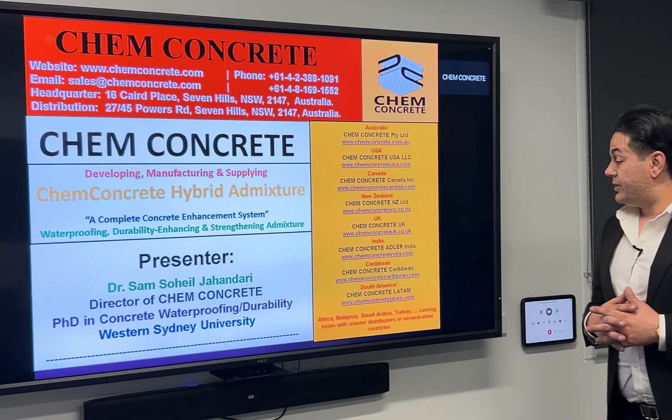Over the past 12 months, we have established manufacturing facilities in other countries as well, like in the USA, Canada, New Zealand, UK, India, the Caribbean, and South America. For more information about these companies, you can check out their website. Right now we are working with other top partners to establish the company in Africa, Malaysia, Saudi Arabia, Turkey, and a few other countries. In some other countries, we also have distributors.

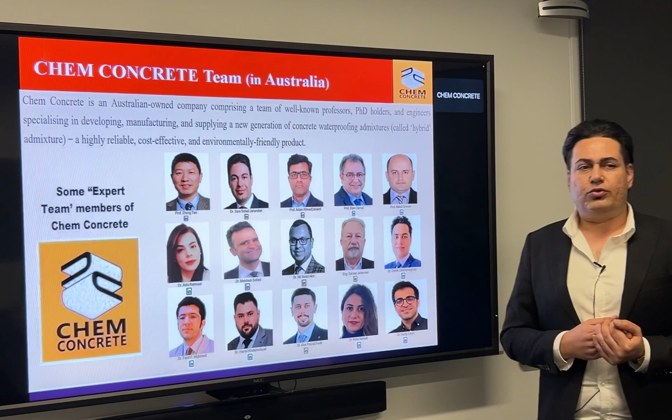We have a very good team at ChemConcrete. You can see some of our team members, just some of our team members in Australia. In general, as an Australian-owned company, ChemConcrete is a rapidly growing company comprising a team of 6 globally distinguished full professors, 14 PhD holders right now, and 12 engineers and some concrete technicians, mostly specialized in the area of concrete technology, concrete durability, concrete waterproofing, with different backgrounds from materials engineering, civil engineering, and chemical engineering.

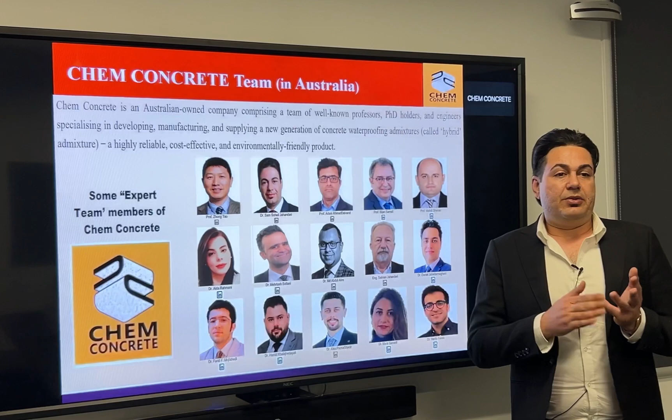The good thing about all the team members at our company is that at the same time they all have extensive industry experience in the concrete industry, and at the same time very good experience in the research sector and research studies. So they know what's going on in the industry, in batching plants, in design sector, different stages of construction, and they are highly specialized in product development as well.

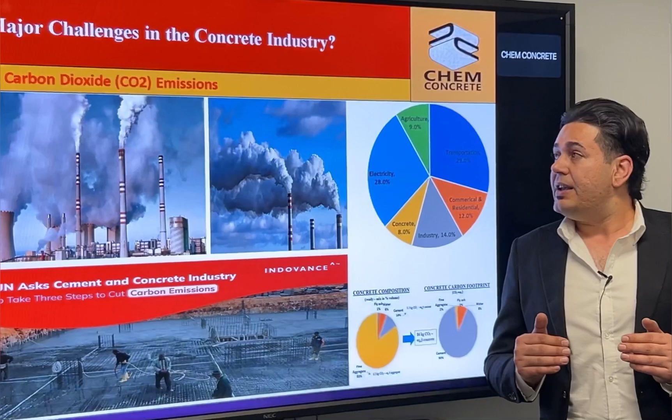When it comes to the concrete industry, two of the most important or major challenges exist. The first one could be carbon dioxide emissions. As you know, cement and concrete industries are responsible for almost 8 to 9% of global CO2 emissions, and it's been for decades that everyone in the construction and research sector has been looking for ways to reduce the carbon dioxide.

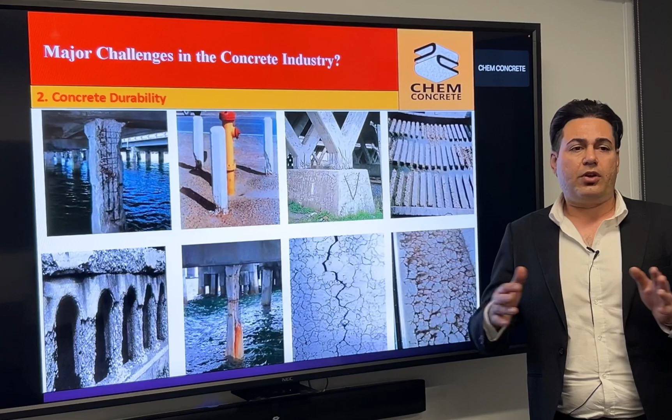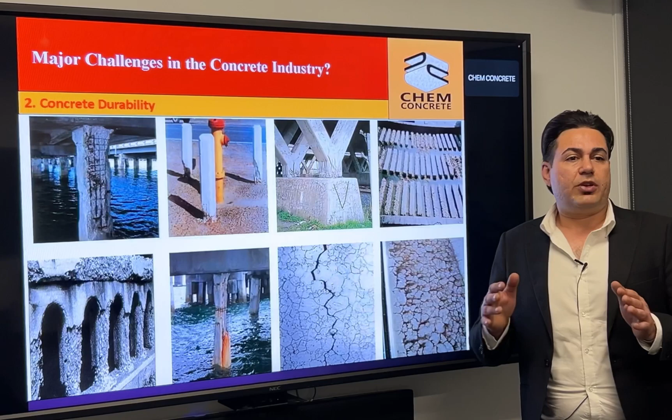The next major issue in the concrete industry is the issue with concrete durability. In all these aggressive conditions, for example exposure to seawater, salt, ASR, sulfate attack, freezing, thawing, reinforcement corrosion, the ingress of water and the corrosive chemicals inside water is the main reason responsible for all the major physical and chemical degradations of concrete structures and pavements. Research has proved that by stopping water and the waterborne contaminants from penetrating into the concrete, we can significantly increase the durability and lifespan of concrete. So water is the enemy of our concrete and construction sites.

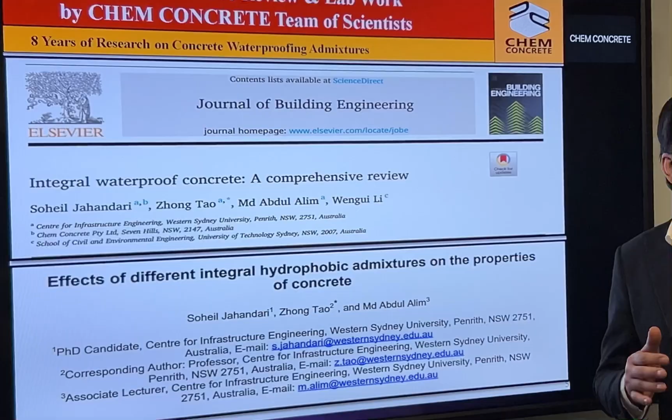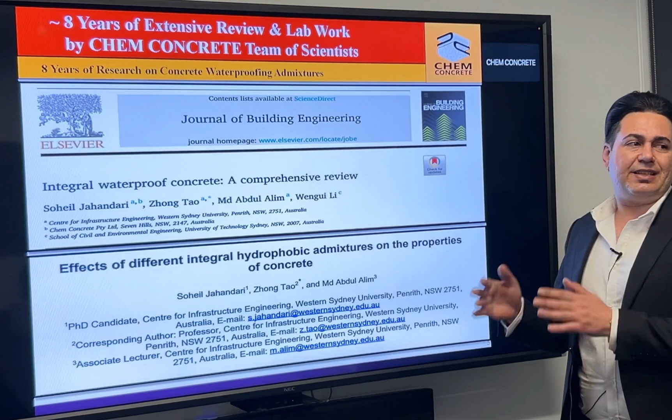Over the past almost 8 years, our team at ChemConcrete has done extensive literature review studies, as well as significant experimental work on development of concrete waterproofing admixtures. So far we have reviewed probably over 5,000 articles, books, reports, almost all the existing literature on concrete waterproofing admixtures and durability.

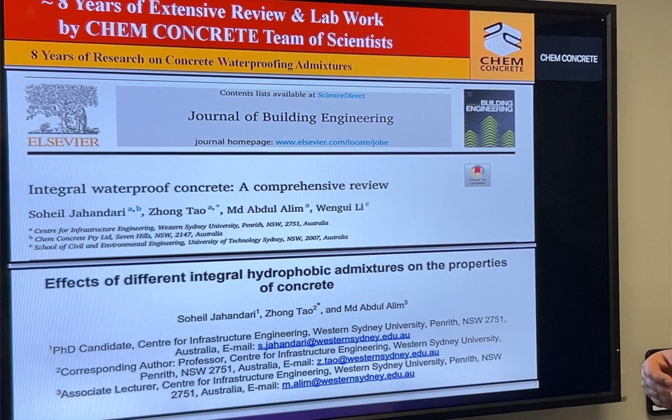At the same time, we have also published some of the most comprehensive sources in the area of concrete waterproofing and durability. For example, you can see the first article here, Integral Waterproof Concrete, a comprehensive review, which we published probably around 2 years ago. It's currently, to the best of our knowledge, the most comprehensive source on concrete waterproofing for engineers, R&D experts, and university researchers involved with developing waterproof durable concrete.

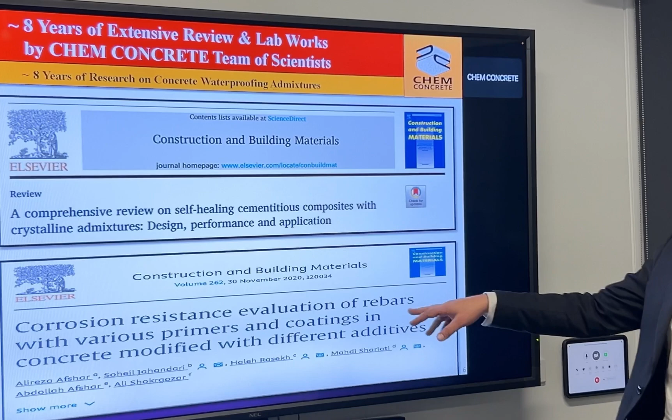You can see some other articles, for example on different types of waterproofing admixtures. Next is one on hydrophobic admixtures, then an article on self-healing or crystalline admixtures. The other one is on coatings, primers for reinforcement corrosion, and different supplementary cementitious materials or other additives. They are all published in top SJR Q1 journals.

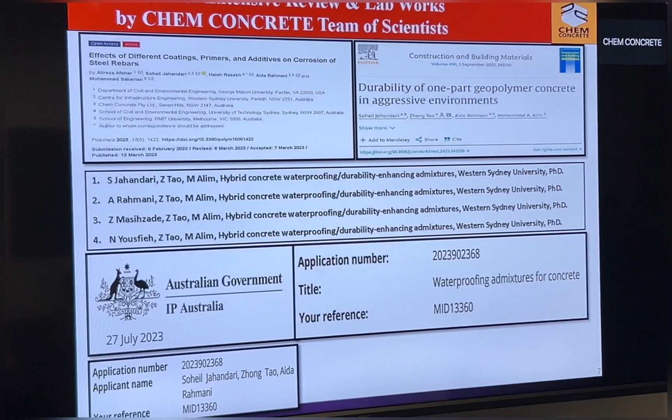At the same time, we have published articles on different types of concretes. For example, the recently published article focused on the durability of one-part geopolymer concrete in comparison to ordinary Portland cement-based concrete, as well as two-part geopolymer concrete. The other one is on different types of coatings, primers, and additives.

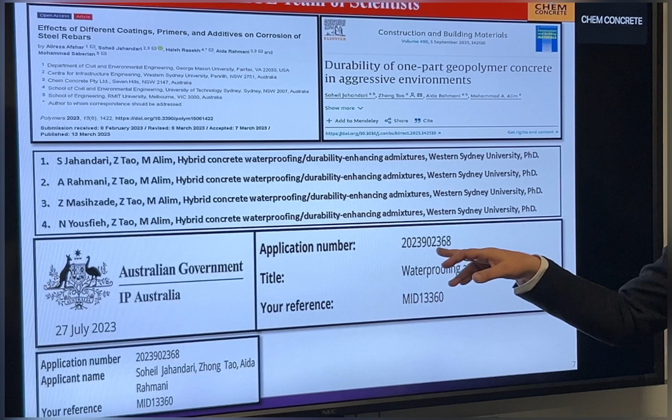Right now we have 4 or 5 PhD students whose research studies have been focused on further advancement of hybrid concrete waterproofing admixture technology at Western Sydney University. You can see the research topics we've been working on, and also the patent that we have with the Australian government, the IP.

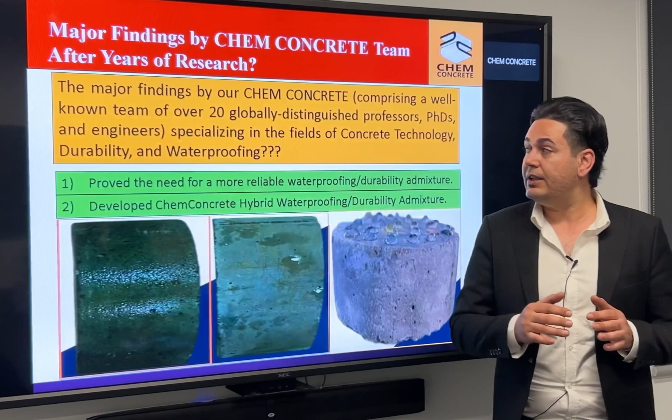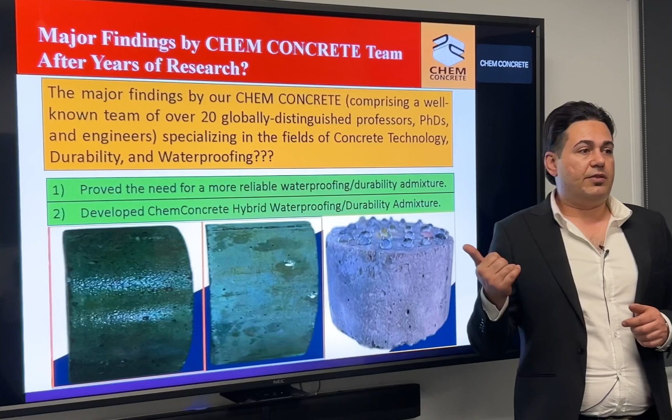Probably if I want to summarize the main findings of our nearly 8 years of research studies specifically focused on concrete waterproofing and durability, our well-known team right now has over 20 globally distinguished scientists, PhD holders, and engineers specializing in this field. We have everyday testing by our R&D team in our private laboratory, ChemConcrete laboratory, as well as partnership collaborations through the Australian Research Council with Western Sydney University, University of Technology Sydney, and University of New South Wales, the best universities in Australia.

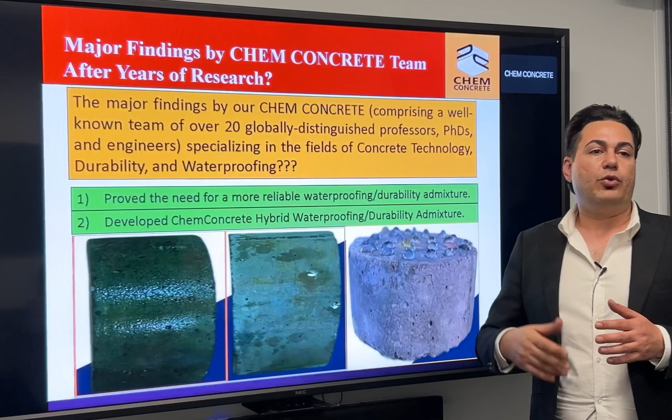If I want to summarize the major findings of our research studies in just 2 small sentences: the first one is that we proved there is a need for developing a more reliable concrete waterproofing or durability enhancing admixture. Once we proved that, we worked for several years to develop ChemConcrete Hybrid Admixture.

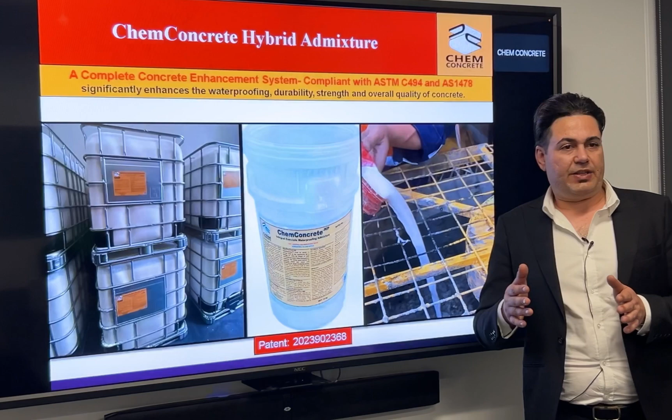The next step, we worked for several years and developed ChemConcrete Hybrid Admixture. Initially, we were aiming to develop a concrete waterproofing admixture with the efficacy to reduce water absorption and permeability of concrete by up to 90%. But at some point, during the development of the admixture, we came up with a product that's not just a waterproofing admixture, but a complete concrete enhancement system, being waterproofing, strength enhancing, and durability enhancing at the same time.

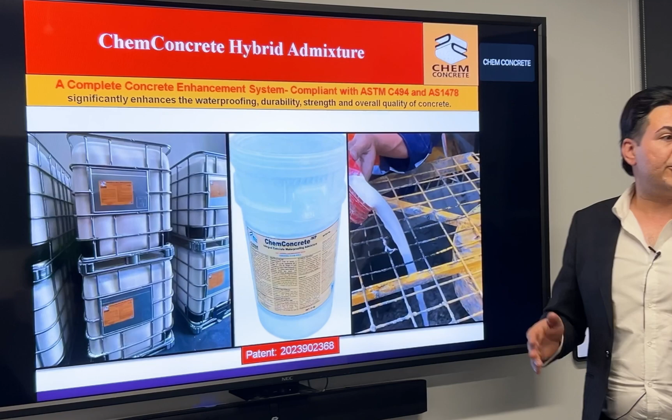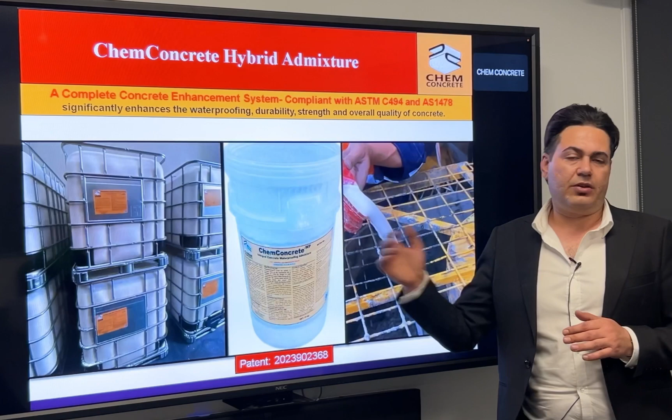It significantly improves the waterproofing, durability, strength, and overall quality of concrete, as well as fresh properties like finishability, pumpability, almost everything. It's in a white liquid form, somehow similar to milk. We normally supply it in 1000 liter IBC tanks, though we have quite limited supplies in 15 liter pails as well. The focus has always been on wholesale supply.

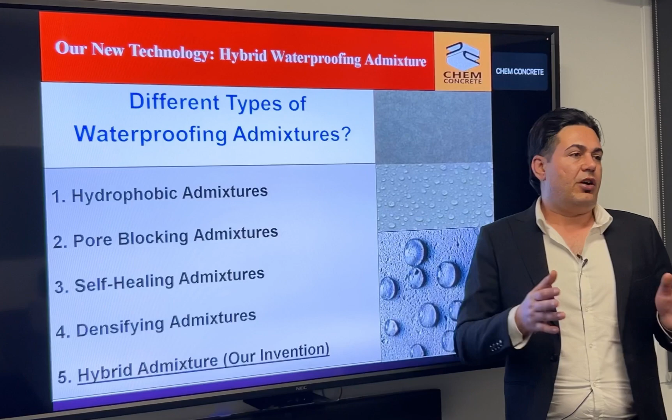Regarding the difference between this technology and existing technologies on the market, before the introduction of our ChemConcrete hybrid waterproofing admixture, these waterproofing admixtures were broadly classified into 4 main groups. The first group, hydrophobic admixtures, works only under non-hydrostatic water pressure, not hydrostatic water pressure. These hydrophobic admixtures typically only slow down the rate of absorption, they don't reduce the ultimate water absorption, meaning the longer the treated concrete is exposed to water, the higher the amount of water it absorbs.

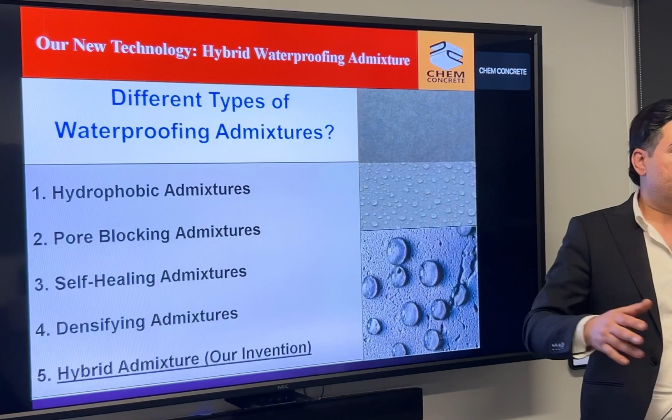The next group is pore blocking admixtures, then self-healing admixtures. Crystalline admixtures are also classified under self-healing admixtures, and then densifying admixtures. While doing all the testing and literature review, studying all the publications done so far on these types of admixtures, we noticed that in the case of hydrophobic admixtures, in the best case, they could reduce water absorption by up to 18-20%. In case of pore blocking admixtures, up to about 15%.

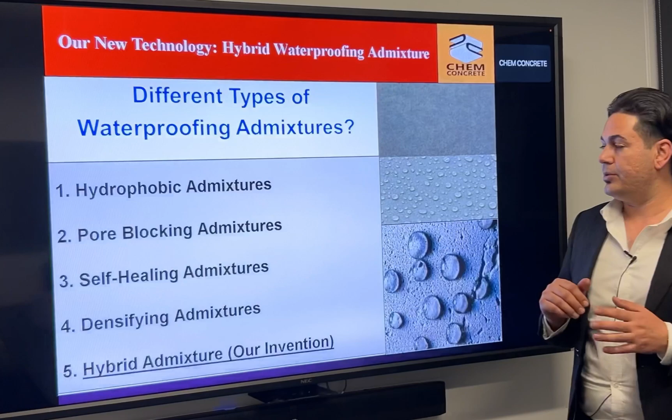Self-healing or crystalline admixtures have a different mechanism. They absorb water and then keep it to develop crystals that fill out concrete micropores, thereby resisting absorption. So again, up to 10-12%. Densifying admixtures like nanochemicals, as well as sometimes supplementary cementitious materials, are also classified into this group.

Their efficacy in terms of developing a true waterproof and durable concrete is extremely limited, and that's why most researchers and engineers do not classify them as waterproofing admixtures, based on the definitions of waterproof concrete.

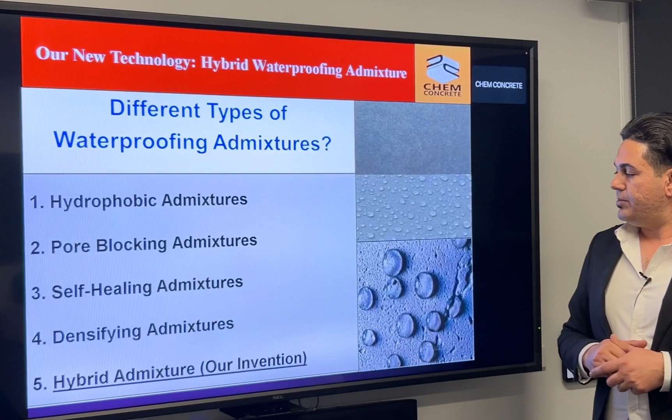So what we did was add a new category of concrete waterproofing admixtures, fundamentally different from all the existing admixtures on the market, called hybrid admixture. It's called hybrid because it's somehow a combination of all the existing admixtures on the market.

At the same time, for example, ChemConcrete hybrid admixture, known as the first hybrid concrete waterproofing admixture, is made of several proprietary chemicals such as hydrophobic or water repellent agents, pore blocking chemicals, self-healing agents - not crystalline but self-healing agents, because there are different types of self-healing agents - nano-size densifying admixtures, and some proprietary chemicals. This means we've used a wide range of different mechanisms to severely disrupt the capillary system and reduce water absorption and permeability.

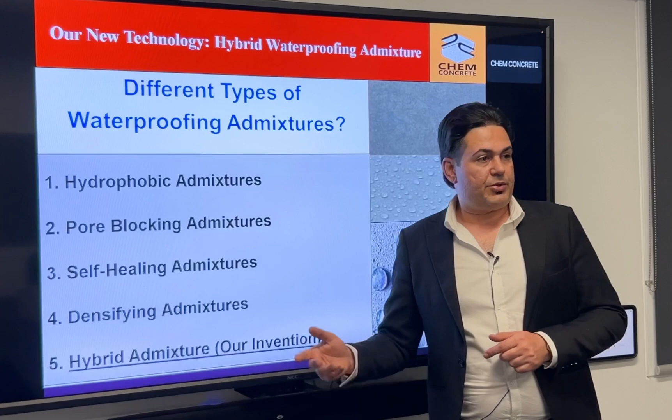That's why independent testing as well as our in-house testing has shown that this admixture, depending on the dosage used, can reduce water absorption and permeability by 70 to 95%, which is a huge difference compared to 10% or 5%. Next slide, please.

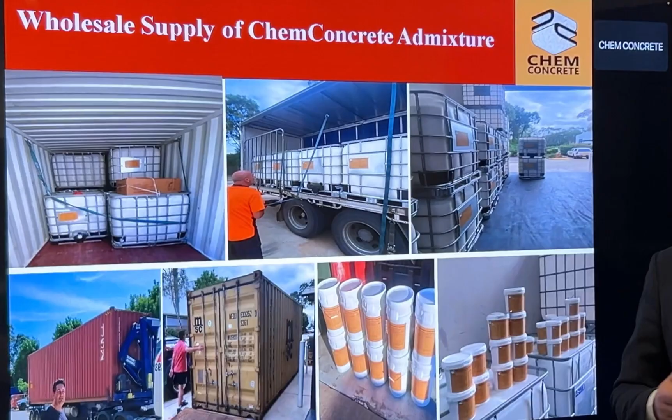The focus has always been on wholesale supply of this admixture to our partners, because as the sole IP holder and manufacturer of this product, it's been more reasonable for us to focus on wholesale supply rather than retail.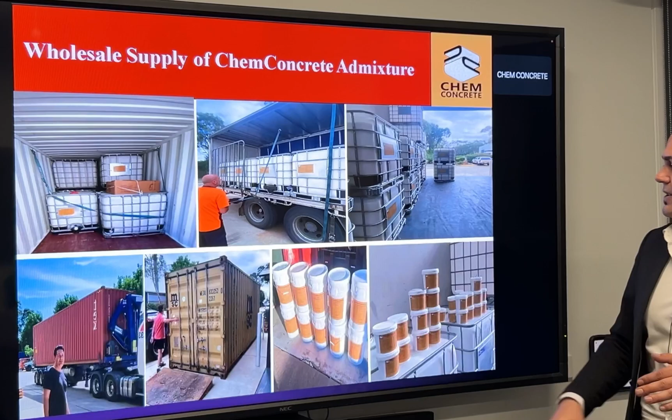So we supply in 1,000 liter IBC tanks. Probably 98% of our supplies are just in 1,000 liter IBC tanks, and then we have quite limited supplies in 15-20 liter pails as well as 2 liter pails. The 2 liter pails are normally for sending samples to different companies to do testing.

So, next one please. Well, this slide is probably the most important slide in terms of technical information.

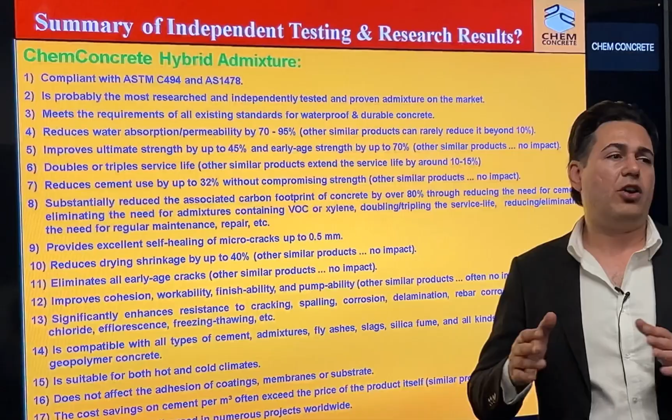So far, during the first year once we introduced the product to the market, during the first 12 months our focus was heavily on supplying free samples to different companies and universities from all around the world, to get in-depth, comprehensive, independent testing. It was important to us to know that it works with a wide range of local materials and different types of cements.

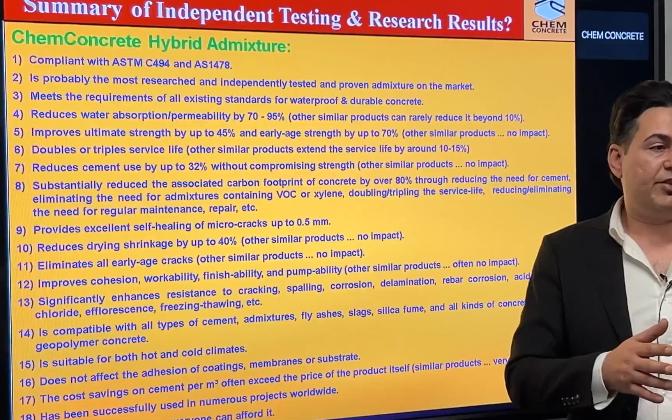On the other hand, for successful commercialization, it was really important to have the product comprehensively tested by different companies. That's why we supplied around 4,000 concrete samples to different companies, laboratories, and universities all around the world.

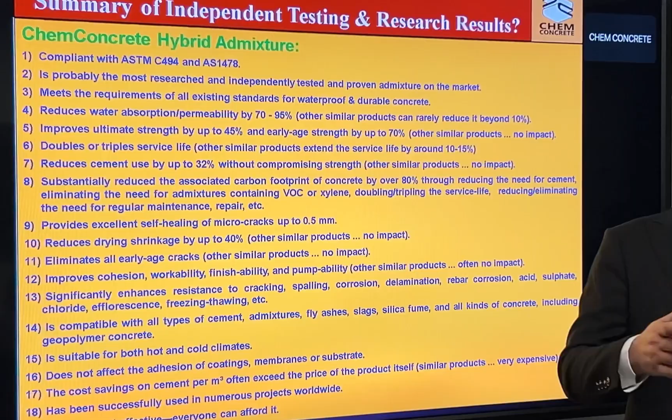So far we have received maybe around 190 to 200 independent test reports from these companies from different countries. The good thing is that all these independent test reports have almost reported the same results as what we reported in our technical documents.

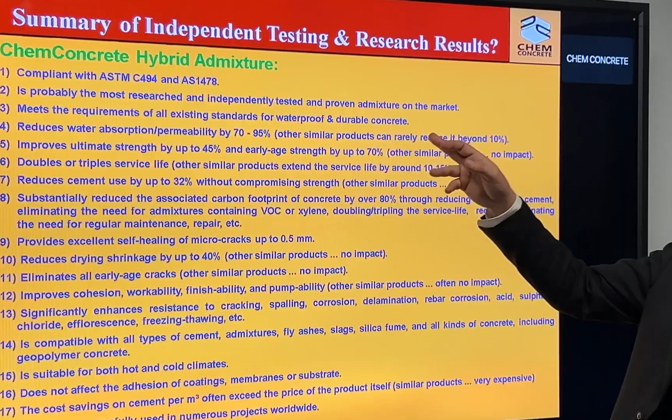For example, the product successfully passed all the requirements of ASTM C494, tested by SGS Tech Services in the USA, a well-known ASTM accredited lab, as well as Boral in Australia, and we received AS1478. So it has 2 compliance certificates from Australia and the USA.

As mentioned before, to the best of our knowledge, despite being relatively new to the market - almost 2 years - right now it's the most independently tested and proven admixture on the market.

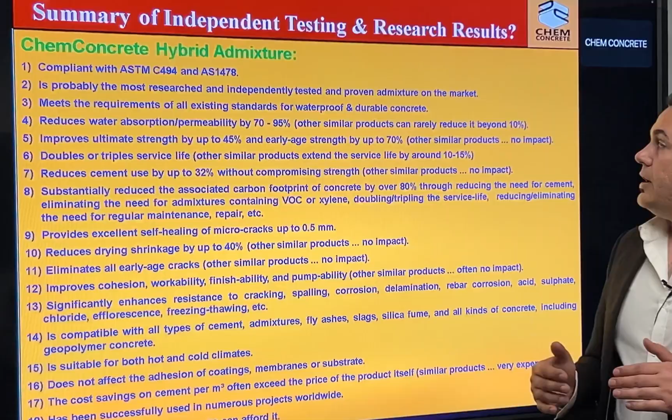We have just summarized the main findings of the independent testing reports. We have the independent test reports uploaded to our website as well. The product meets the requirements of all the existing standards for waterproof and durable concrete.

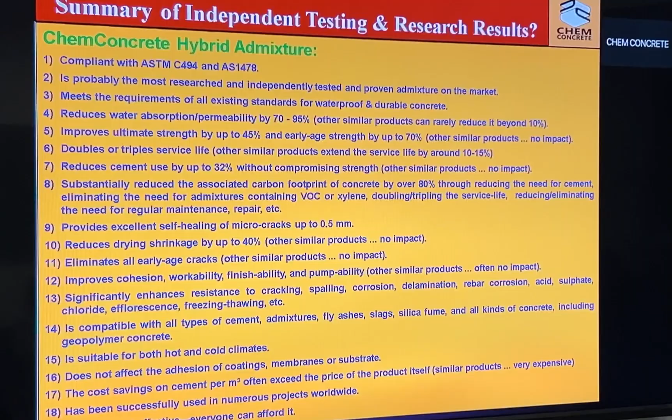It reduces water absorption and permeability by 70 to 95% depending on the dosage used, whereas other similar products can rarely reduce it beyond 10%. And it improves the ultimate strength of concrete by 45%.

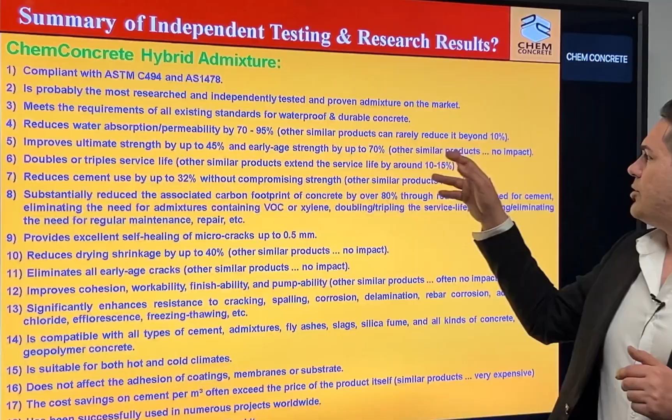Sometimes 50%, and early age strength of concrete by up to 70%, again depending on the dosage used. Other similar products typically don't have impact on strength properties of concrete, but we know hydrophobic admixtures and some other admixtures have slightly negative impact on strength properties of concrete.

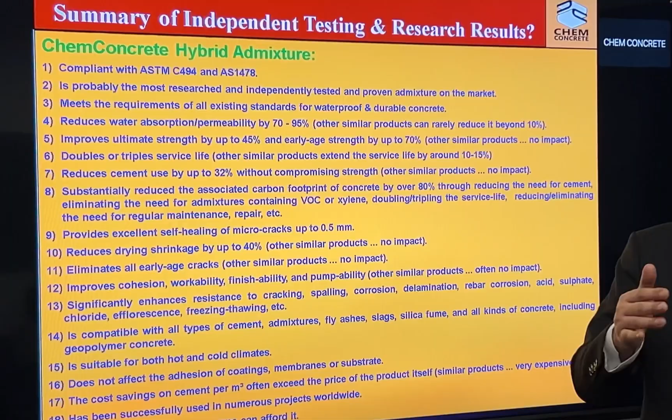The test results, durability monitoring, long-term durability monitoring, as well as life cycle assessment on these test results have also shown that the product can double or triple the service life of concrete, again depending on whether the minimum dosage is used or the highest recommended dosage is used.

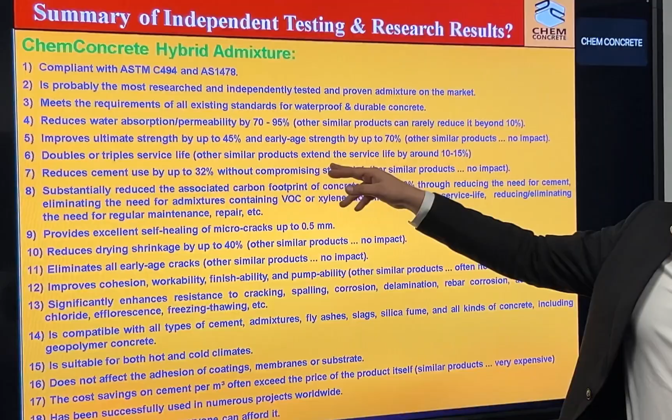Other similar products have been proven to extend the service life by usually around 10 to 15%. And then another significant advantage is that our product, because of significantly increasing the strength properties, allows reducing the amount of cement by up to 32% without compromising the strength. But typically other products don't provide such an opportunity to reduce the amount of cement by up to 32%.

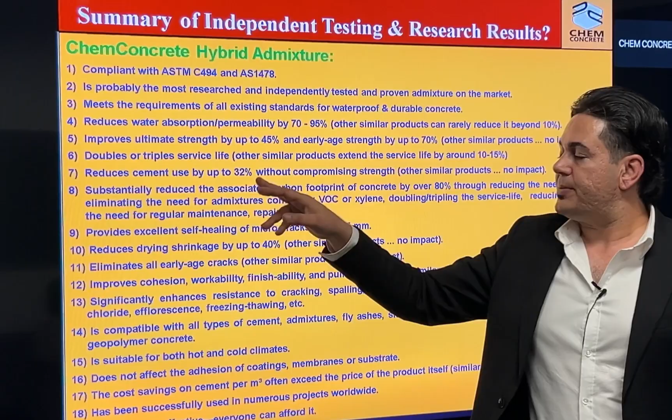And in most cases, this 32% cement saving, the cost saving from cement is higher than the price of the product itself. The other thing is that the product substantially reduces the associated carbon footprint of concrete by over 80%.

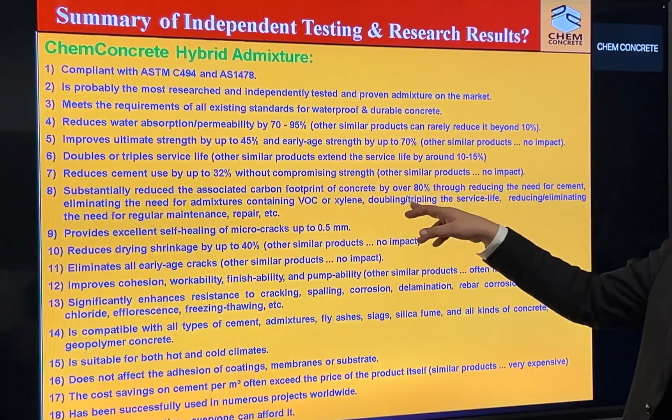Through different benefits, like the first one, through reducing the need for cement, eliminating the need for admixtures containing those nasty VOC or xylene or other harmful chemicals, and most importantly, doubling or tripling the service life of concrete. Because doubling or tripling the service life simply means fewer needs for regular maintenance, repair, reconstruction, and at the same time eliminating the need for those membranes which are typically not environmentally friendly.

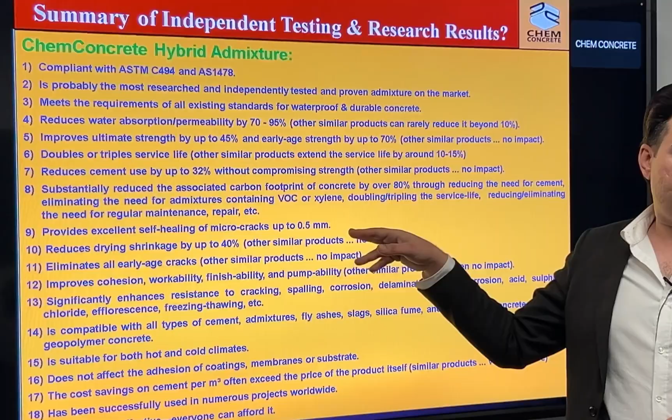It provides excellent self-healing of microcracks up to 0.5 millimeter, which based on our experience, is the highest self-healing that an admixture can provide. And then it reduces drying shrinkage by up to 40%. Other similar products typically don't have any positive impact on reducing drying shrinkage.

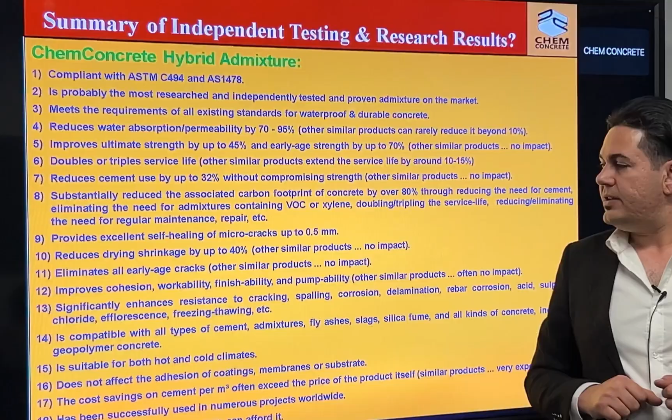The next one is eliminating almost all early age cracks, shrinkage, thermal cracks, and these things. Again, typically other similar products have almost no impact on these properties. And the other one, which is really important, is the product significantly improves the cohesion, workability, finishability, and pumpability.

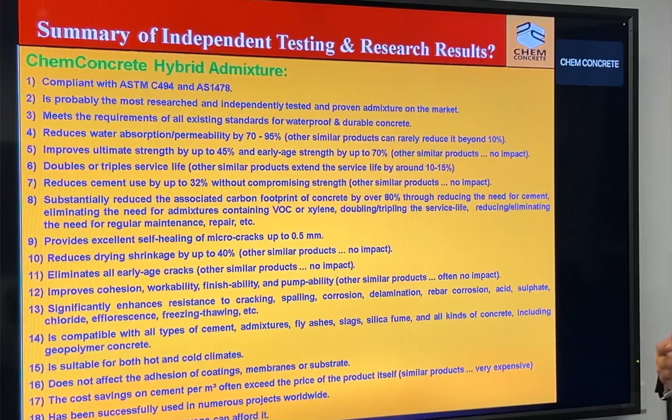All the fresh properties of concrete, which makes it interesting for those finishers and those who are using it.

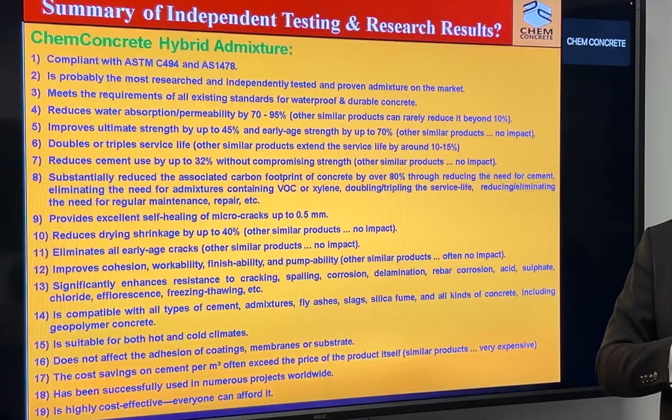At the same time, it significantly enhances resistance against cracking, spalling, corrosion, delamination, rebar corrosion, and against chemicals like exposure to acid, sulfate, chloride, freezing, thawing, efflorescence. In all these conditions, based on the test results, it shows at least 3 times longer or higher strength or lower mass loss in those durability tests.

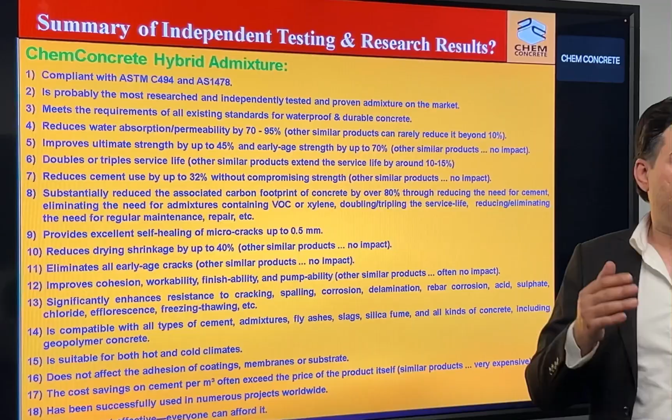And again, the other thing that's really interesting is the fact that during the research process, we tried our best at the research and development sector to focus heavily on those ways by which we can physically deliver a true waterproof and durable concrete.

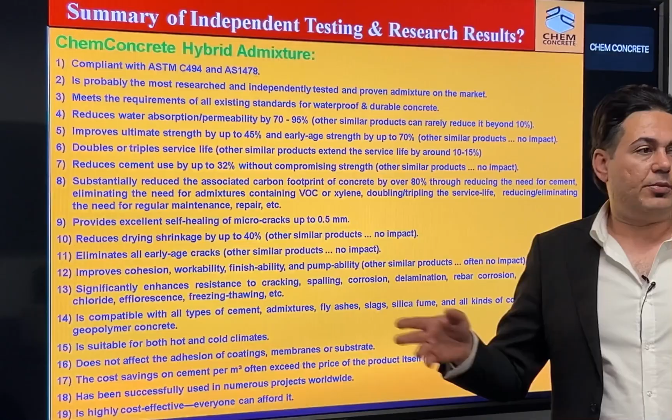That's why the chemical formulation is very safe. It's a solid chemical formulation which does not easily react with the other additional chemicals or materials that are going to be used inside concrete. That's why we mentioned that it's compatible so far with over 200 test results that we have received from different types of cements, from different manufacturers, different aggregates, other admixtures.

We have lots of other admixtures that have been used together with our admixture. The test results show that it's compatible with almost all types of cements, admixtures, fly ash, slag, silica fume, and all kinds of concrete, including geopolymer concrete.

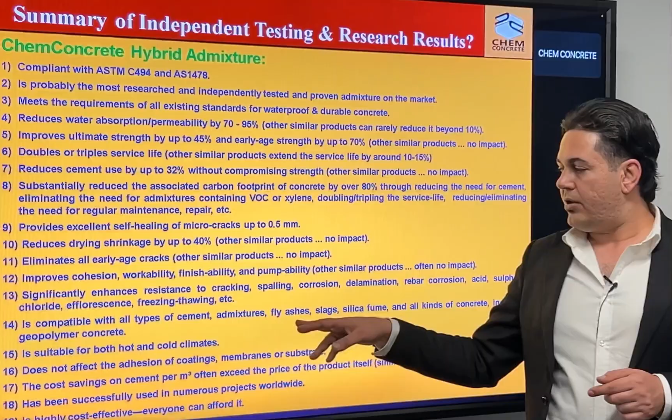And the other thing is that, unlike many other admixtures, there is no minimum cement requirement or minimum water to cement ratio or those things when using our product.

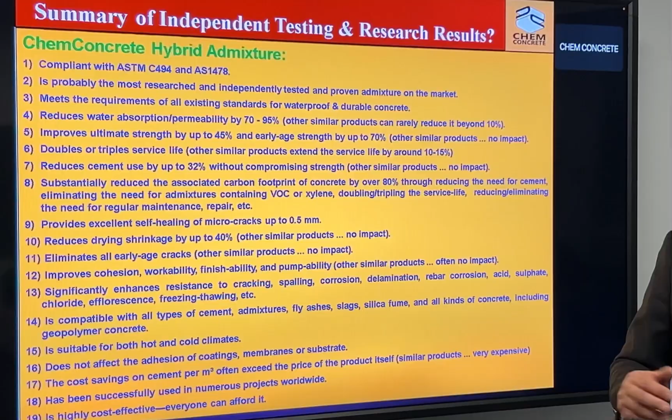So, it's suitable for both cold and warm regions, and does not affect the adhesion of coatings, membranes, or other materials that are normally used as surface protection or anything like that.

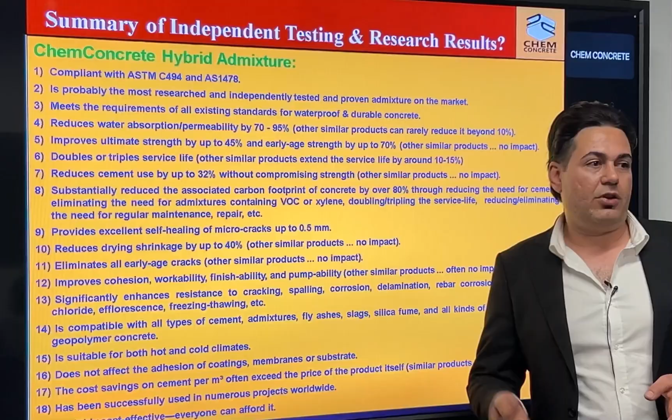What makes it really interesting is that the cost savings on cement per cubic meter of concrete, like 32% less cement, sometimes exceed the price of the product itself. But similar products, especially in Australia, cost say $90 up to $150, $160 per cubic meter of concrete, which is huge. But this product, especially for ready-mix suppliers, it's almost going to be for free.

But there are lots of other additional benefits: waterproofing, extended service life, carbon footprint reduction. So, lots of other benefits at almost zero cost.

It's been successfully used in numerous projects worldwide so far, and as mentioned before, it's very cost effective and everyone can afford it.

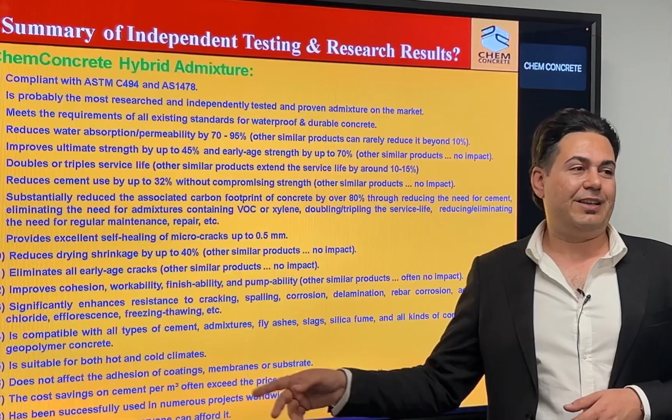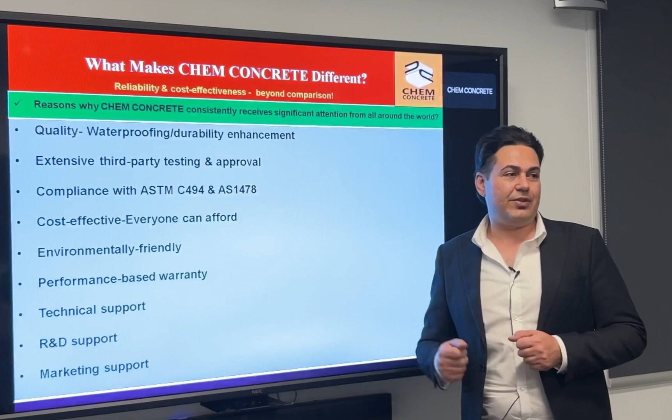Next one, please. Over the past probably 12 months, 1 to 2 years, ChemConcrete has received huge attention from all around the world, leading to establishment of manufacturing facilities right now in several countries, mostly developed countries like the USA, Canada, South America, Australia, New Zealand, and many other countries. So the reasons why I think this product received huge attention and is consistently receiving huge attention, I've summarized some of them here.

So in short, we can mention that in terms of reliability and cost effectiveness, it's way beyond comparison compared to the others. Well, so the first one could be because of the quality.

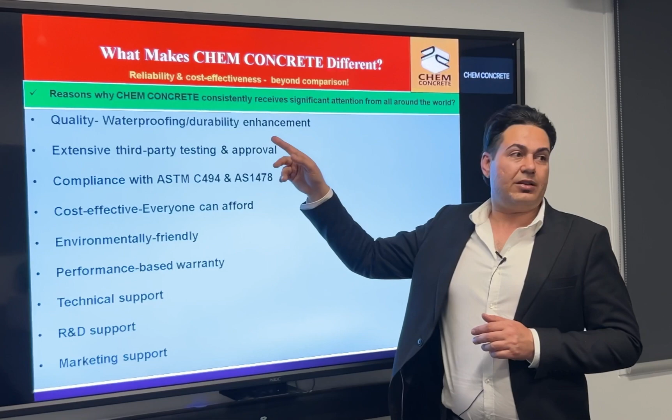In terms of delivering a true waterproof and durable concrete, we claim that our product is at least 60% more effective than any other similar product in reducing water absorption rate, permeability of concrete, water penetration depths, as well as enhancing durability in exposure to corrosive chemicals, acid, sulfate, chloride, freezing, thawing, efflorescence, and reinforcement corrosion.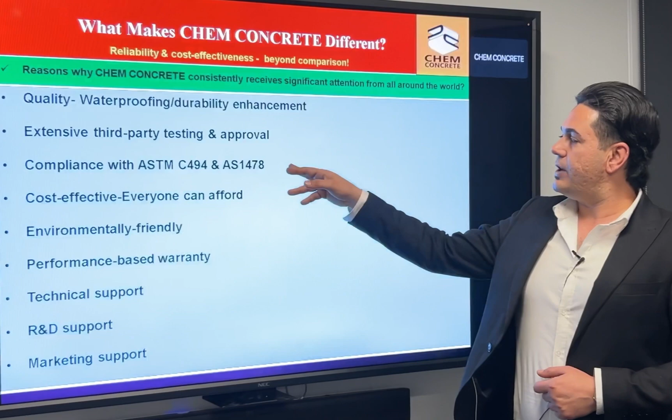So it's fully compliant with ASTM C494 and AS1478, which means design engineers can easily specify it and rely on these standards. We are right now in the process of receiving more compliance certificates. This ASTM C494 base is accepted in several other countries.

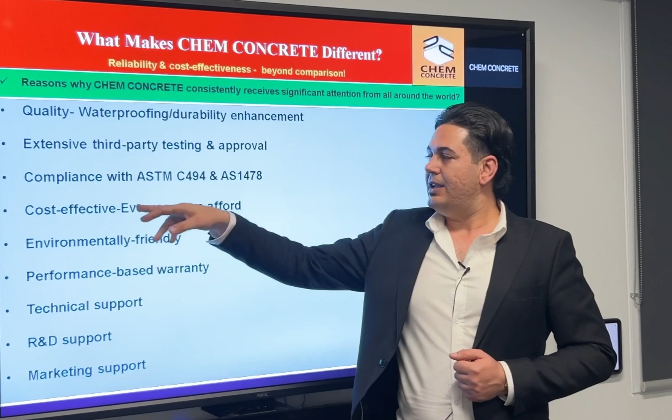And then the other thing is that while providing the best quality, it's the most cost-effective product to the best of our knowledge, which means that again everyone can afford it.

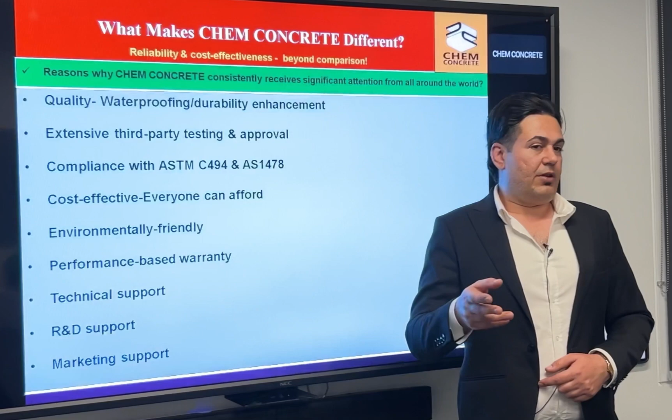So it's environmentally friendly, which means the product itself, as well as all the ingredients used in manufacturing, are classified as non-toxic, environmentally friendly, with no or very low risk to human environment. This is especially important these days, because there is a huge global shift towards using environmentally friendly concrete admixtures, reducing carbon footprint, and all these things. So it's really important for a product to be environmentally friendly, not having nasty elements like VOCs.

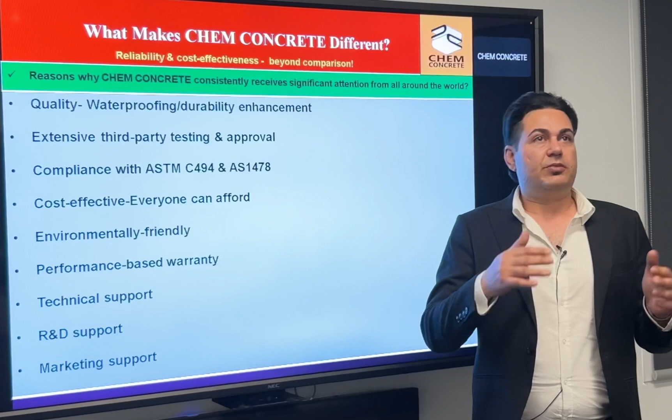And then, under some conditions, we can provide performance-based warranties, sometimes up to the design life of the project, especially when we have on-site supervision, with a certified applicator from our team adding the admixture in batching plant to the concrete. In that case, as far as we know, probably in Australia we are the only supplier who can provide such long-term performance-based warranties, doing either full refund or accepting all the repairs.

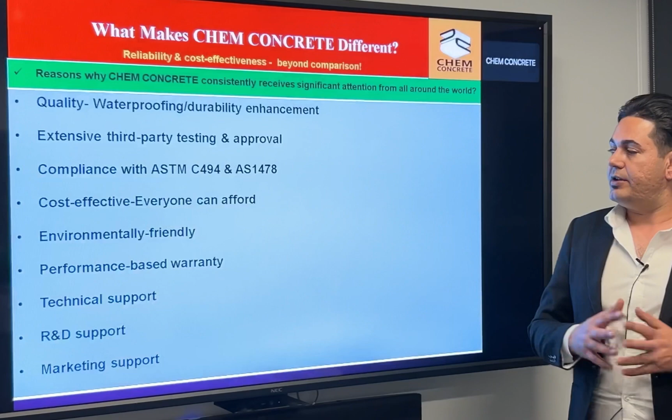And then we have excellent technical support. As I mentioned before, probably 98% of our supplies is wholesale to our partners and distributors, exported to different countries, but we still have limited supplies, mostly to ready-mix suppliers. So in terms of technical support, we have a very good team.

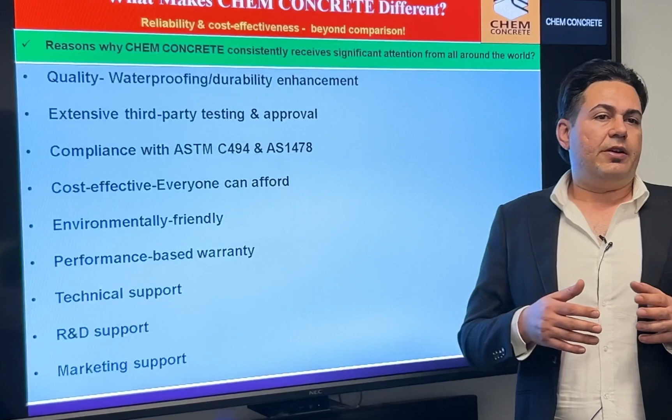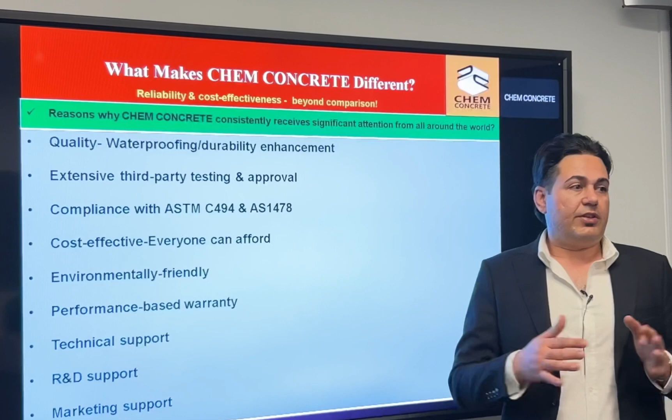What we are doing is that every day we are running free technical webinars to our partners, to our distributors, potential customers, specialized on concrete waterproofing and durability, mostly managed by our team in Sydney, to educate and provide all the information they need about the product, its different features, and how to use it.

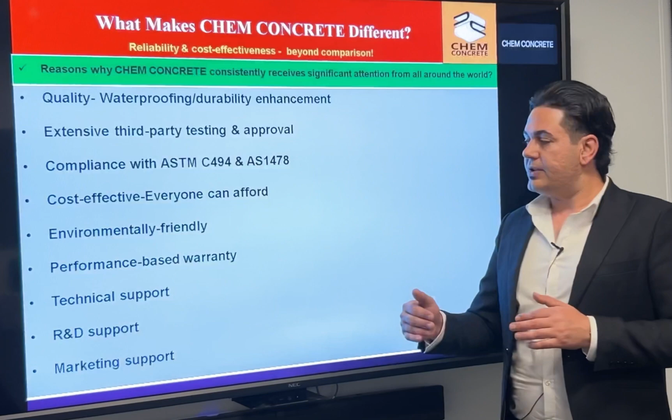We also provide support to our partnering companies where we have established manufacturing. In terms of R&D support, for example, last year we received a substantial grant from the Australian Research Council, and we received grants also in partnership with Western Sydney University, University of New South Wales, and other private companies, allowing us to continue our research studies for several years, probably up to 2035.

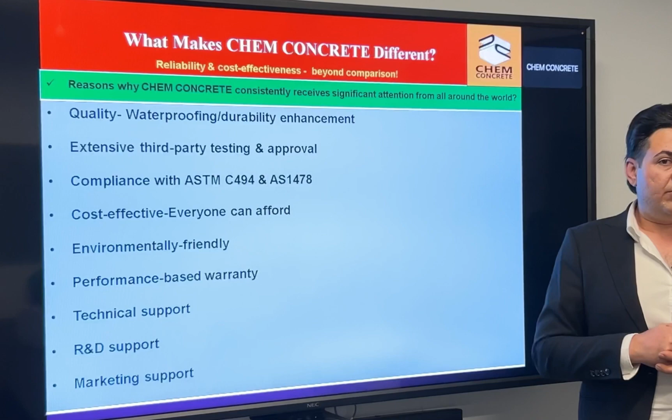And then in terms of the other thing which is really important is the marketing support that we provide to our partners and distributors. Right now, our ChemConcrete team, including all team members, we have the largest network among concrete and construction professionals on LinkedIn. The team members, as well as my partner, who is an influencer, Dr. Merter.

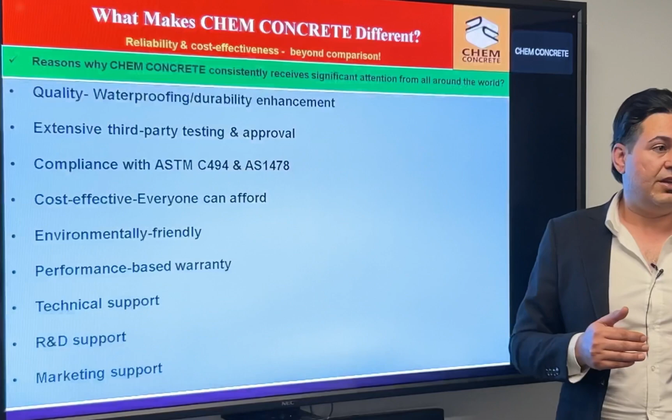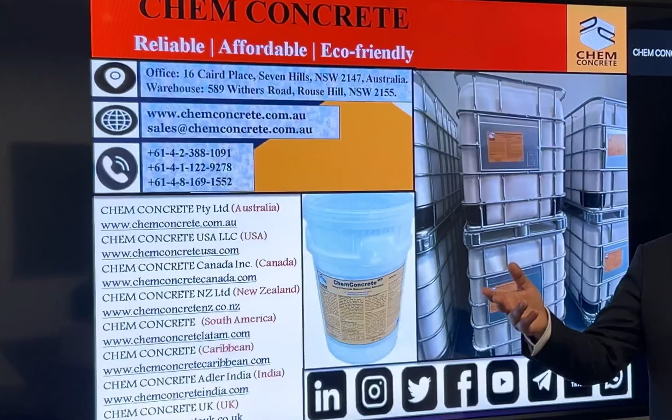So we provide marketing support as well, mainly through digital marketing, social media marketing, LinkedIn marketing, because right now we have the largest network among concrete and construction professionals with over probably 1.1 million followers, mostly from decision makers in the concrete and construction industry. This means we already have the opportunity to raise awareness about the benefits of this new technology and product, and that's also important in helping generate leads to our partners and partnering companies, to our distributors, and so on.

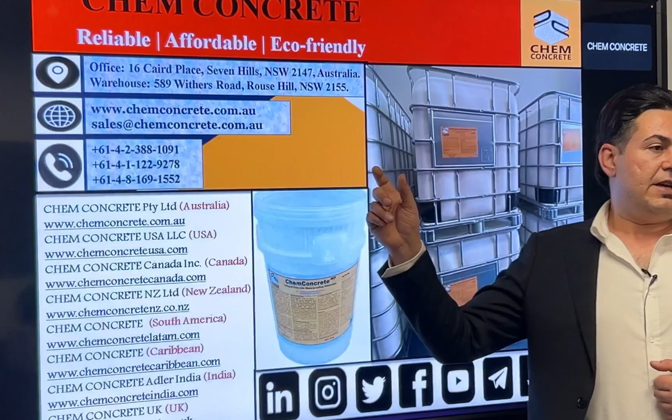So here you can see, for more information, there's lots of independent testing results, technical documents, how we reached those numbers mentioned in the previous slides, like 80% carbon dioxide emission reduction in carbon footprint, and all those things. These documents are uploaded into our website, mostly the parent company in Australia, ChemConcrete.com.au, in a section called technical documents. You can access those documents and read more information and details on how we reach those numbers, lots of independent test results and all those things, as well as other information on our other websites.